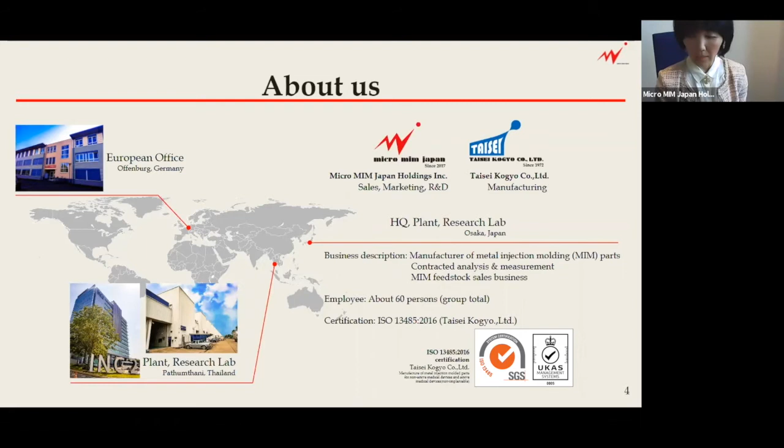Under Taisei Kogyo factory, we are certified with ISO 13485. The reason being that our main industry, which means 50 to 60% of our customers, are in the medical device sector. This is why we switched; we used to have 9001 and then 14001 together, and then we switched to 13485 in, I think it was 2019.

Now, those of you who know MIM might be a bit bored with this slide, so I won't take too long. But basically, MIM is a powder metallurgy process. And first of all, we combine the metal powder, which is this, and binder. So the question is, which part do we do of this? We do buy them, and then we combine them, which is this kneading and pelletization process, and then make them into pellets. The pellets are, just like the plastic injection molding pellets, if you have seen, about the same size and same shape, which are now put into the injection molding machine.

Then, when we make the parts, components like this, for example, we do not want any more of this binder inside, because at the end of the day, we want a metal part without any other material. Therefore, we put it in the debinding and sintering oven. In some other companies that produce MIM parts, they have the debinding furnace and sintering furnace separately. However, in our company, we do this as one step. So it's one furnace for those two processes. And debinding is sometimes called degreasing as well. So if you hear degreasing or debinding, it's basically the same thing.

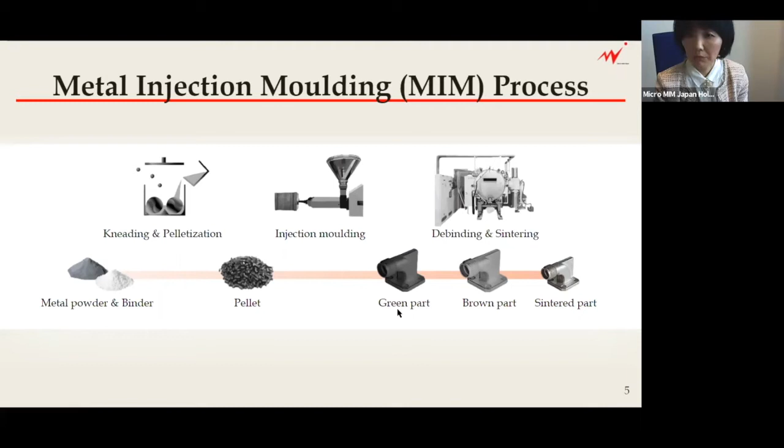Now, this brown part is after the debinding, which in our case, we don't see at all. Then the sintered part, or in some cases, it's called silver part. This is the final metal part. Of course, in some cases, we might do some secondary process on top of this, but that's another topic to discuss. So you can see that it is shrinking. So from green part to sintered part, it's quite a bit of shrinkage. And this shrinkage rate varies depending on which metal powder and binder we combine, and particle size and so on. So this is something that is different from material to material.

Now, the product or technology overview. The microMIM that you know from our company, registered as our name not here in Europe but in Japan, is, compared to the conventional MIM, a lot better in many areas. But we are naming these three because these are often asked by our customers. So with conventional MIM, you will get about plus minus 0.03 millimeter when the size or the dimension is 5 millimeter or less.

But with our microMIM, you can expect plus minus 0.01 millimeter if we use the smallest powder size in stainless steel. So same with relative density. If you are talking about conventional MIM, this is just average, 95 to 98%. And with our MIM, 98.5 is minimum. We get a lot more than this often. And this is again the same. The base is the stainless steel smallest metal powder size.

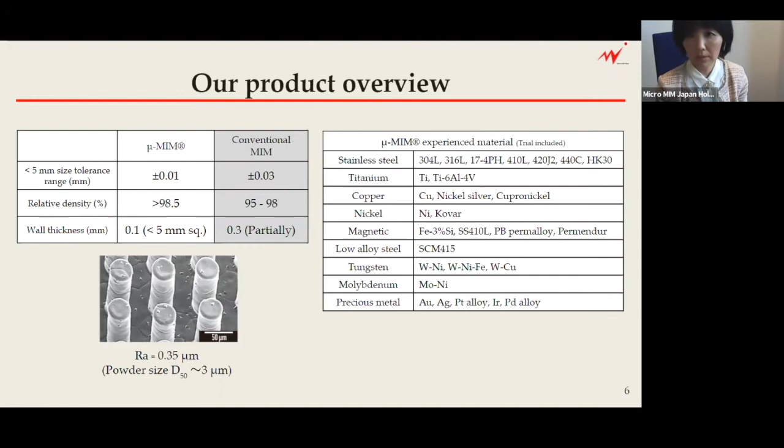Now, the components that are here, some of you have seen them in real when we were able to meet in real, and after COVID, we haven't been able to meet most of the customers. So for those who have not met us yet, we have prepared this so you get some idea of what kind of parts are possible. And I would like to mention that these are just some that we are allowed to show.

So yeah, we are basically making a lot of medical device parts like this, the medical forceps. And these are just really some. There are so many different varieties, but of course, being medical, we are not allowed to show most of them. So the forceps are one of the quite often manufactured metal components. And this particular one is disposable, so after each operation of the patient, they are disposed. Others are permanent, so you can use it for both types.

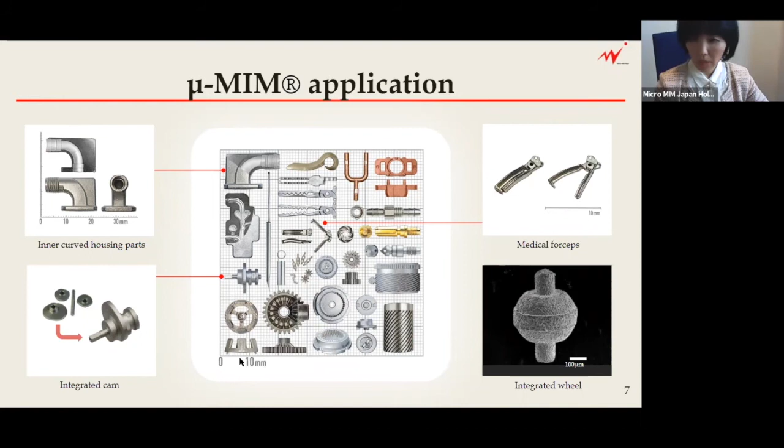So yeah, this kind of very small size is also feasible. And then the copper parts are here. These are pure coppers. Then another example is this copper alloy called nickel silver. And then we do also have some other metals, but many are actually stainless steel parts. This is a soft magnetic material. Okay, so I would move to the next one.

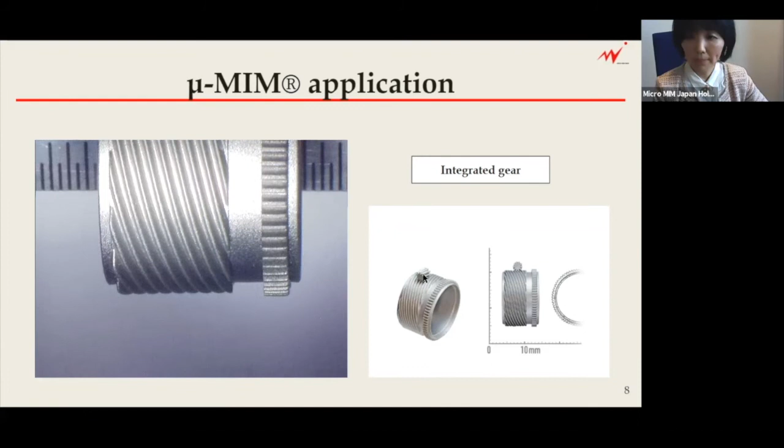This is the set of this big gear, which is an integrated gear. As you can see, this and this in one ring, so to speak. And then you have another tiny helical gear here that is combined with this area. So you can see more clearly that it is quite nicely made with no visible parting line.

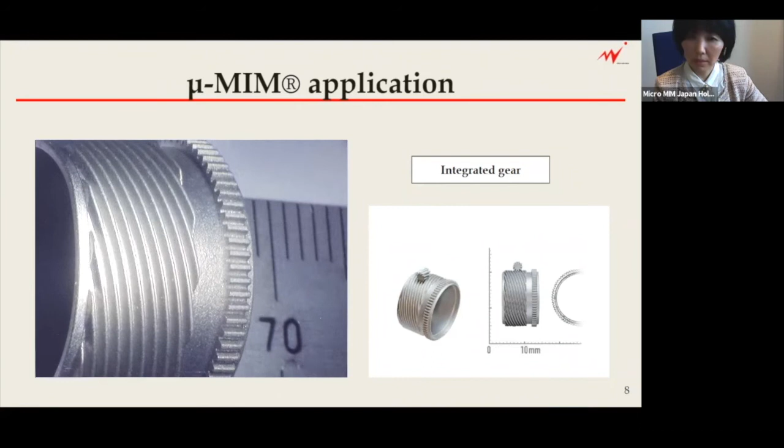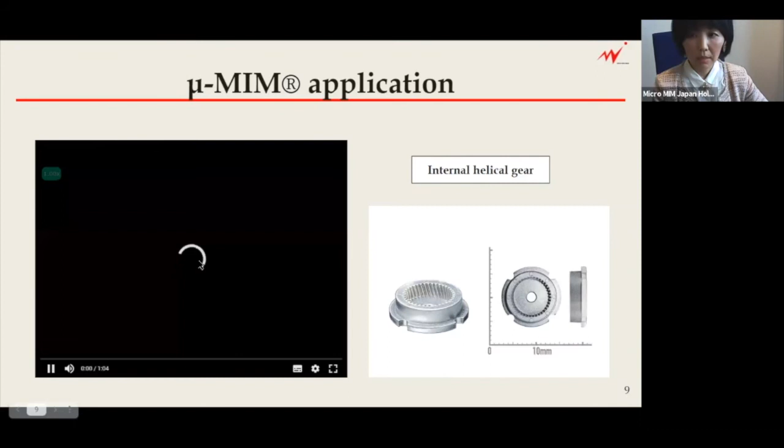So a lot of the medical device gears are helical gears because they are good for not making much noise. This is another helical, but this is an internal helical gear. And as you can see, the helical is here, and then on the bottom is a lid. So it's very difficult if you want to manufacture these for serial production with other manufacturing technology. So for this kind of gears, it is ideal to use MIM technology.

And for those who are not so familiar with MIM, these circles are the ejection pin marks that will appear somewhere on the parts. But of course, we can discuss beforehand, before the production or before the prototype, where you cannot have them. So they will not appear on the critical places, like outer parts or some functional places of the component.

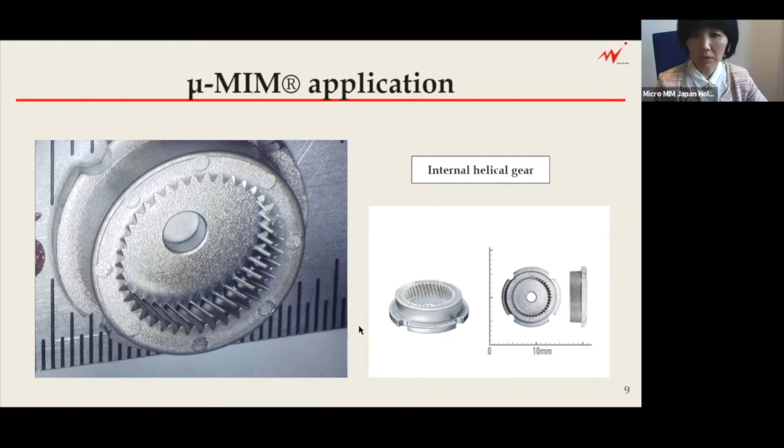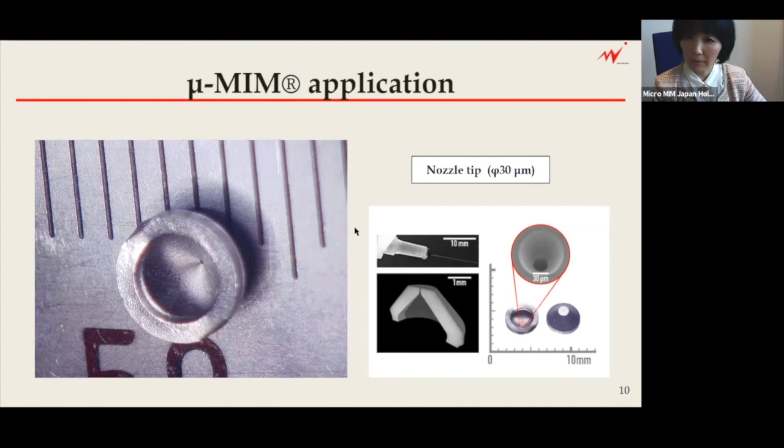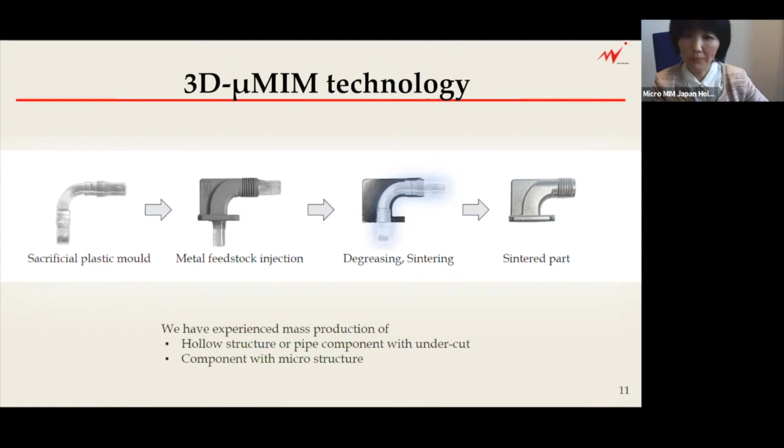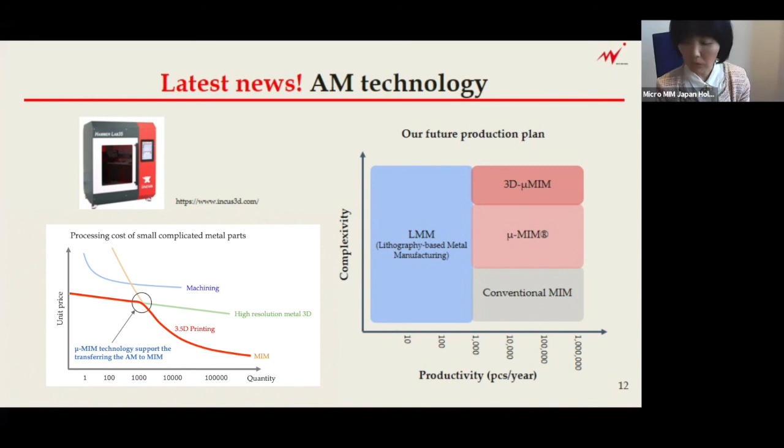So you can evaluate your prototype parts for 100 parts or 50 parts or 500 parts. And then you can do your design change when you move to serial production. Then you can invest in the mold to go for mass production. Yeah, so this is excellent to have this opportunity.